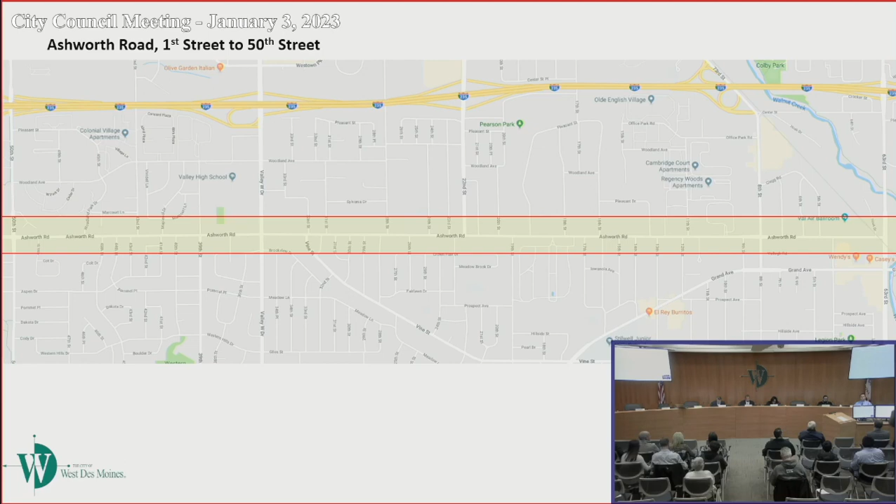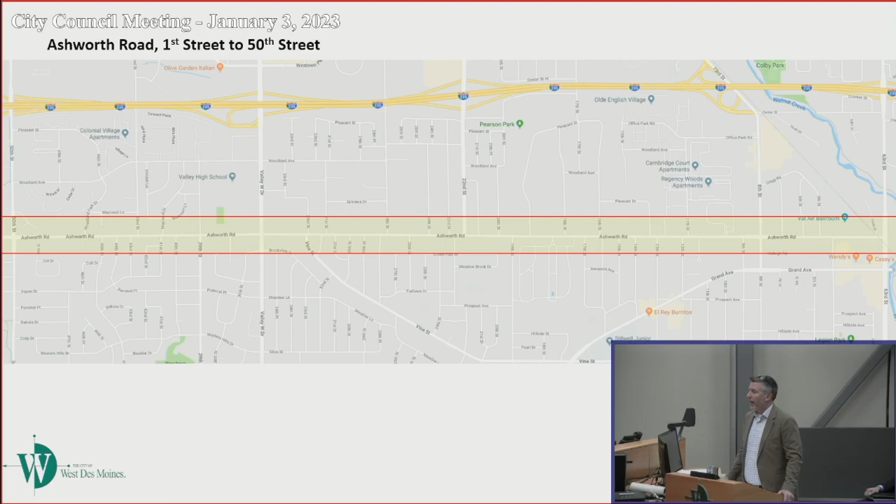Brian Hemesath, city engineer. I met with some of the council members about this, and one of the council members can't be here tonight, and that's Councilman Trevillyan. I've got a letter that I will start off reading, and then I'll go into a presentation, and then I'll answer any questions from council members, and then we can go into comments from the crowd.

As he mentioned, this is a letter from Councilman Trevillyan, who really wanted to be here but was unable to attend tonight. Ladies and gentlemen, as I am unable to attend the city council meeting on January 3rd, I would appreciate it if the following letter would be read during the workshop for the Ashworth Road project and made part of the permanent record of the meeting. So we will go ahead and make this part of the permanent record for our workshop.

I've had several discussions with our city engineering staff and residents about the Ashworth Road reconstruction project. Although I understand staff's reasoning for recommending a 3-lane configuration with a dedicated turn lane the entire stretch from 1st Street to 50th Street, I do not believe this is the best design. This is a residential roadway with over 150 driveways and 49 intersections.

A large number of the residential properties have driveways that require cars to back out onto Ashworth Road, and by having only 1 lane east and west, it will be difficult to get a break in traffic to be able to get onto Ashworth. With so many intersections controlled by a stop sign, it will be difficult to turn onto Ashworth. Also, there will be drivers waiting to turn into a driveway or side street and having to wait for a break in traffic. I am concerned that drivers will get frustrated with waiting and will 'take a chance' and cause a crash with another vehicle.

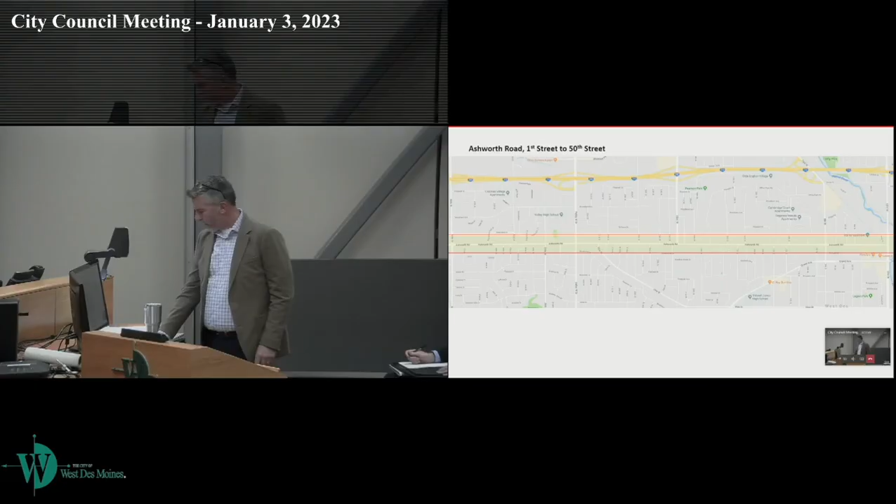Okay, Brian, if you want to lead us through. I will briefly take it through the presentation, I'm going to try to be as brief as possible. We appreciate that because I believe everybody here has heard this presentation several times. There's some new information here, a little different than what we've given in the past. Some of the council members have seen this.

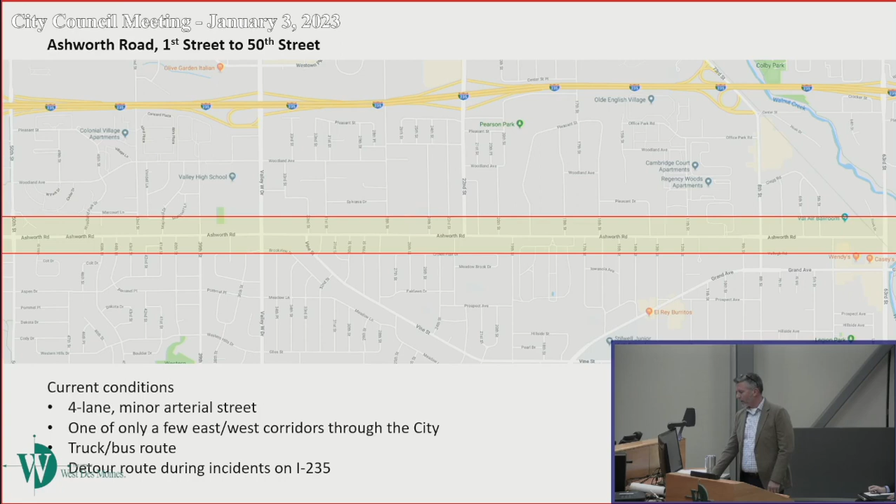Generally speaking, the current conditions of this road are a 4-lane minor arterial. It's one of the few east-west corridors we have through the entire city. It's a truck and bus route and detour during 235 closures or incidents.

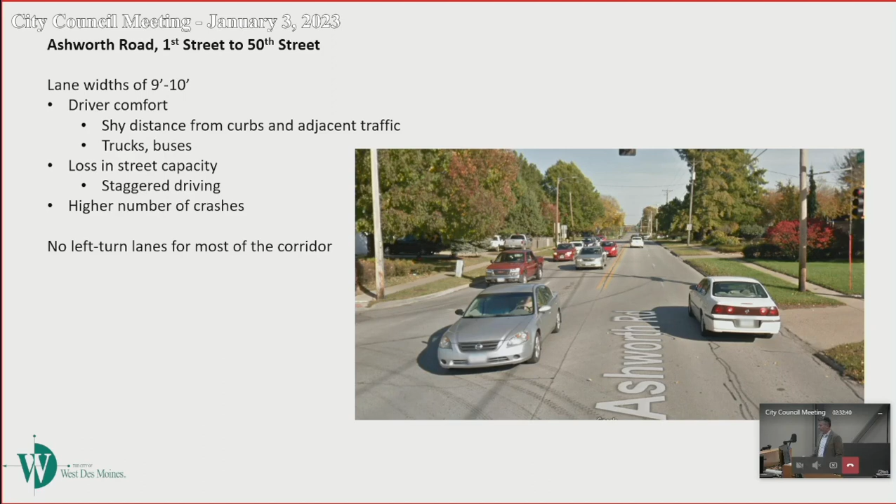Everybody's seen this, they know that the current lane widths are narrow, that driver comfort is an issue. We have issues with street capacity because of staggered driving, and you can see some of that here in this picture. And then we do have a high number of crashes, which I'm actually going to go through in more detail.

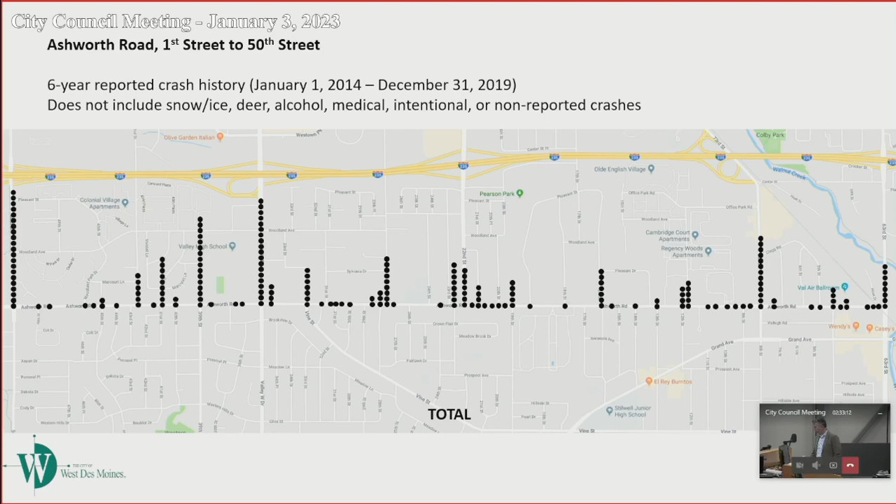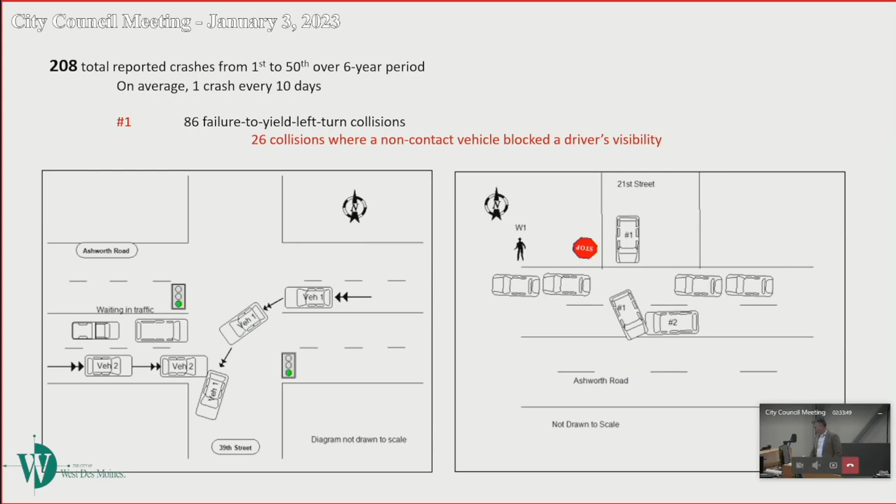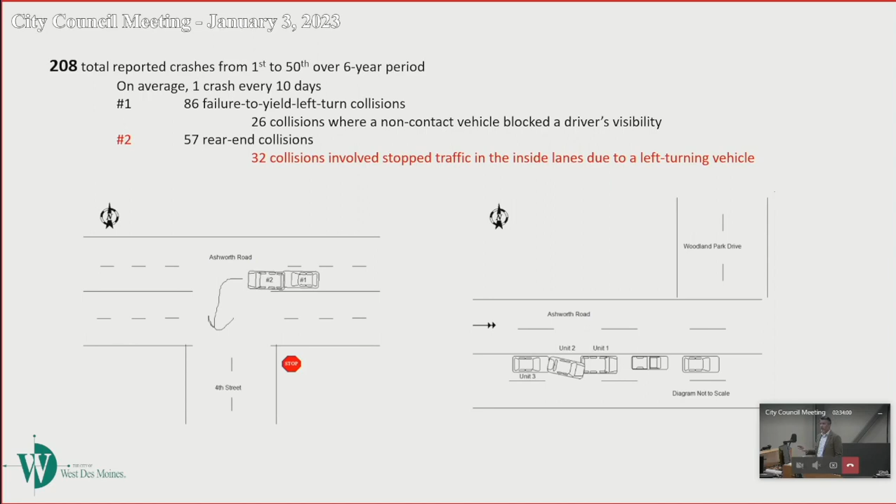26 were directly attributable to the fact that this is a 4-lane road and doesn't have a left turn lane, so there's 26 collisions in that 6-year period. Rear end collisions, there's 57, but 32 were directly attributed to a left turning vehicle, meaning that if there would have been a left turn lane, these collisions would not have happened.

And then lane departure collisions, which is more in line with the lane widths. If you have narrow lanes and cars running alongside of each other, side swiping, striking vehicles while turning, and or running off the road - those collisions are directly attributable to the lane widths.

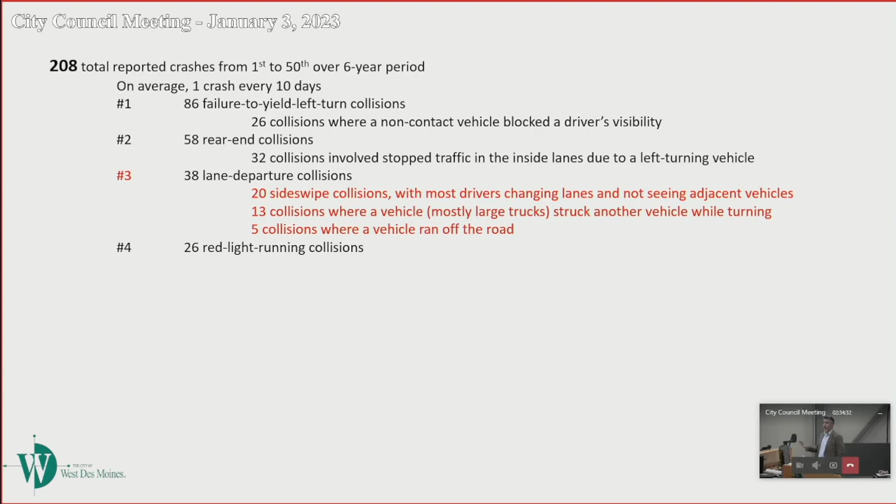So this is the same slide as before, but what we've done is colored in the dots of crashes that are directly attributable to not having left turn lanes - those are the red dots - and the yellow dots are directly attributable to having narrow lanes. And you can see there are a lot of colored dots.

You'll notice that at 50th, Valley West, 8th Street, there's no colored dots there. Those intersections have a high volume of traffic, that is why there's a higher volume of crashes there. And those intersections are already widened out to the maximum amount that we would ever widen them out to, so we're not going to correct any crashes no matter what we do to Ashworth at those intersections.

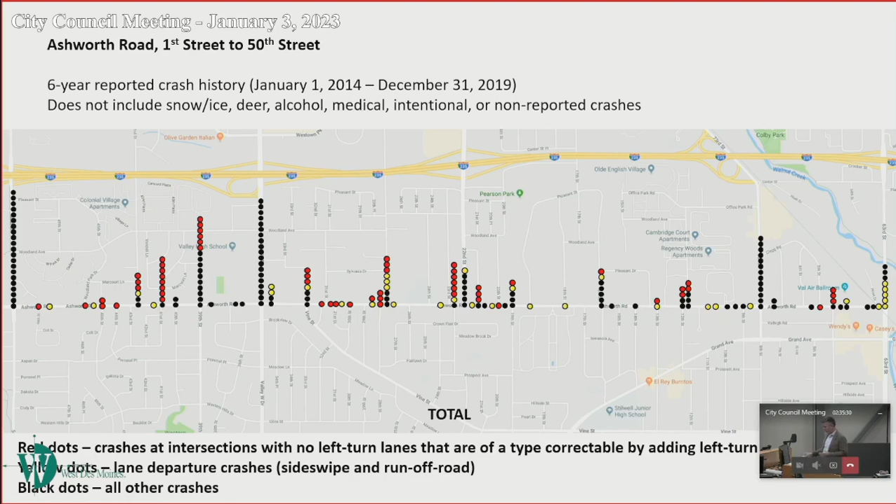So in summary, there's 147 total crashes. The lack of a left turn lane is a contributor in between 40 and 50% of those, 10 to 20% on the narrower lanes. And of all the crashes, 40% of them resulted in injuries, with 3 crashes resulting in serious injuries. Is that 40% of the total crashes, or of the crashes attributable to the 4-lane sections? Okay, that are attributable to the 4-lane sections.

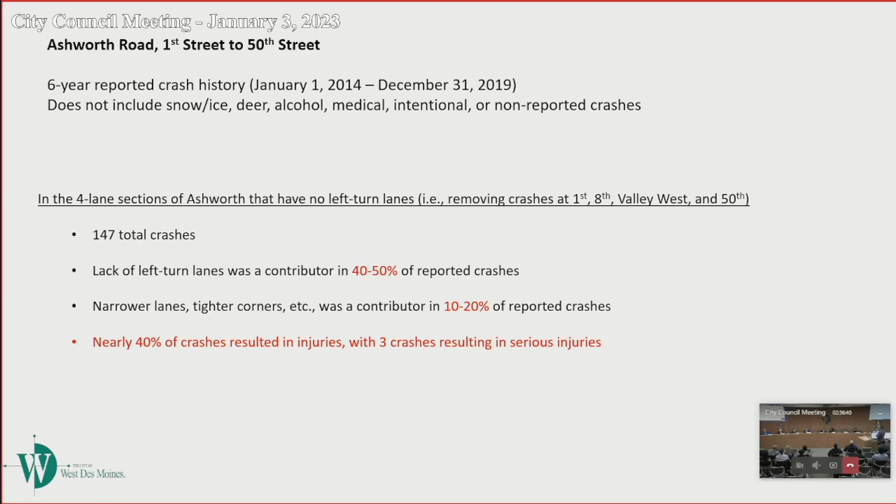Brian, can I ask a question? Sure thing. Could you just go back? So are you saying that 50 to 60% of the crashes are attributable to the current configuration on Ashworth? Correct. And these are 50 to 60% of crashes for the current configuration, ruling out DUI or anything else? Yep, we ruled out DUI, and we actually removed the crashes at 1st, 8th, Valley West, and 50th, because those are already widened to the maximum, and we're not going to be able to fix anything at those intersections. Okay, thank you. You bet.

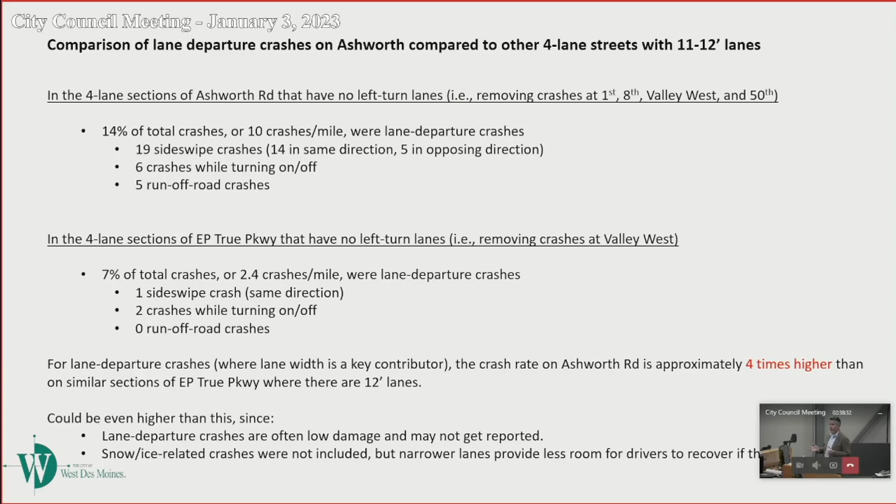One of the big things we need to talk about today and have a decision on by the end of this meeting is whether we have a 3-lane road from 1st to 50th, or a 4-lane road from 1st to 50th.

I'm going to go through the feasibility of a 3-lane cross-section for Ashworth. Safety improvements are probably the biggest thing—we eliminate the 40 to 50% of crashes that I showed in an earlier slide, virtually eliminated because of the introduction of a left turn lane.

We've done a lot of research on studies done across the state, with help from residents who gave us studies to review. We found that research is overwhelmingly clear: 4-to-3-lane conversions provide safer operation.

Looking at studies in Iowa for 15 before-and-after locations, you can see the reduction in crash rate, crash density, and injury crashes. We've also found in a lot of cases it helps with speed—it calms traffic and slows speeds down. It's one of the top safety countermeasures according to FHWA and the DOT.

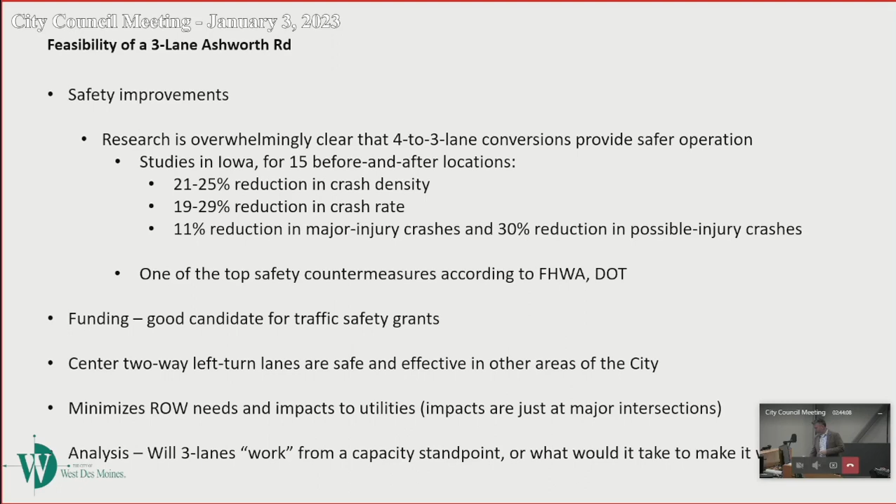We can't do a do-nothing option. We have to replace Ashworth Road. I think that's something that is pretty evident.

We've also heard folks ask about doing a pilot project. We could do a pilot project. The idea would be to let it sit for several years and analyze the crashes and how it works and so on. And in that time, 19th to 22nd is going to deteriorate to the point that we're going to have to spend potentially hundreds of thousands of dollars, up to $1 million, to re-overlay that so we can buy ourselves more time. Because the last time we did that overlay, which wasn't very long ago, that base was not good. That is why we're in kind of an urgent situation to get something figured out for this section, because it looks great today, but it won't take long. A few more winters like we've been having, these cold temperatures, freeze and thaw, freeze and thaw - it's not great for that subgrade.

So how much did that overlay cost us? I don't know that off the top of my head. Yeah, it's in the hundreds of thousands of dollars. And when we're doing overlays, I mean, the age of the road, when it was initially laid to the last overlay we do, we're talking decades. Oh yes, decades, absolutely. 50 years. We like to get 30 to 40 plus years out of our concrete pavements. And then we try to do anywhere from 12 to 8 years on our overlays, depending on conditions and the conditions of the pavement beneath. And that's after doing concrete patches. Oh yeah, that 30 or 40 years includes crack sealing, concrete patching, and a lot of other work as well.

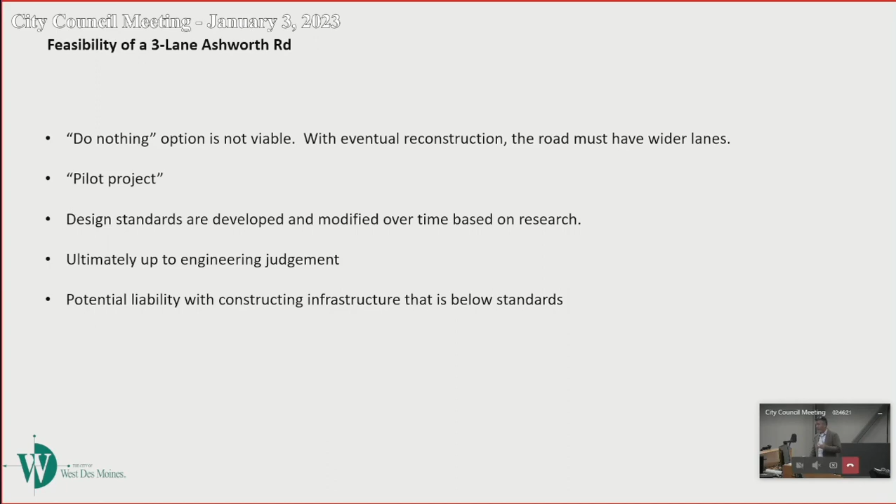Okay, I'm going to try to get - I'm going to skip over a few of these. Our design standards are developed and modified over time based on research. Ultimately, it's up to our engineering judgment to provide what we think is the best solution to you, which we are going to show you now.

At the last workshop, there were several alternatives brought up by your constituents with different ideas of what we could do between 19th and 22nd. We've looked at those and we're going to present them here now. What I do want to do is show you the first one, which is the recommended alternative. I'll go back to it because we're going to have to switch between slides and show you the differences between the two. I'm not going to go through the reasons why we're choosing this option - there's 10 of them listed on the screen there.

But this is the best option overall from a city standpoint. Is it the best option for the people that are getting right-of-way purchased from them? Probably not, that's the facts. But for the greater good of the city, this is the best option. And I'm telling you that as a professional, giving you that advice at this point in time.

So this was one of the options that was brought up: how can we just do 3 lanes in there, because with the two-way left turn lane, we can shift and adjust lanes and just keep it 3 lanes all the way through.

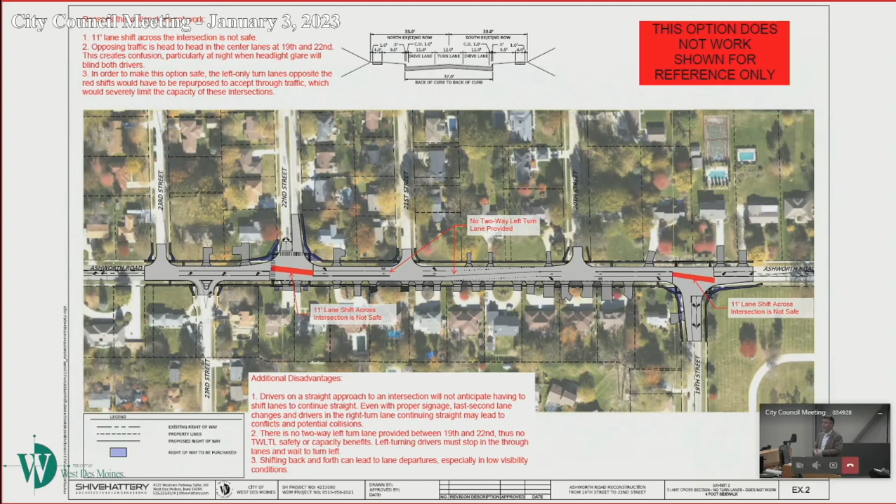You'd have to shift twice, and one of them would be in an intersection, and you don't want shifting in an intersection, because as you're driving through the intersection, you're going to be head on with the left turner, and then you're going to have to turn 11 or 12 feet to get out of the way of that car to continue on. Driver expectation is not that.

I'm trying to remember what the difference between this option and the next option is. So, two-way left, one doesn't. Okay, so this, and Eric maybe, this alternative is four lanes between 19th and 22nd, 3 lanes coming into it from both directions.

But again here, you have to shift traffic. If you're going westbound, you have to shift over a lane to continue through this intersection, and that again defeats driver expectation. Another thing is we would have to paint these lines on the pavement against what the pavement joint lines are, and the de facto lanes, when you can't see pavement markings, are the concrete joint lines. So this again is not a great option.

And this one is basically just carrying a 4-lane section through, painting out certain areas. But again, you've got to shift traffic through. If you do anything from a 3 to a 4 to a 3 through this intersection, you're going to have to shift traffic, so a person driving through these 3 blocks is going to have to move over to make that work, no matter how you cut it.

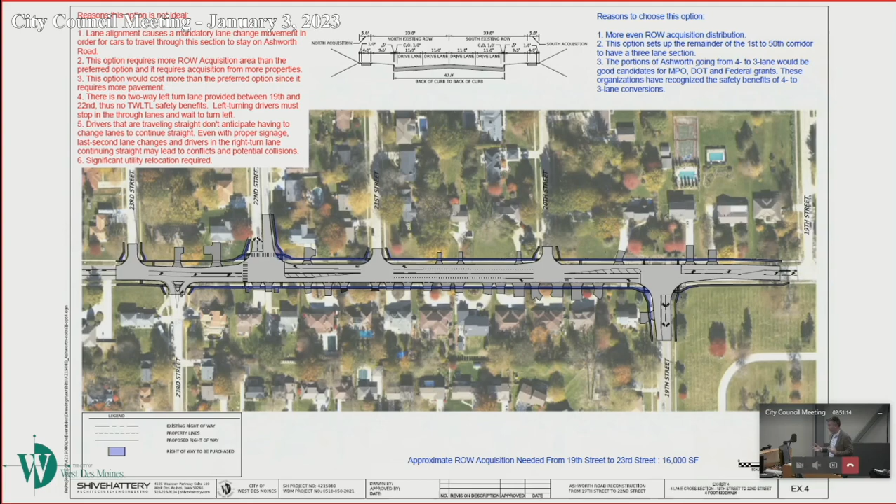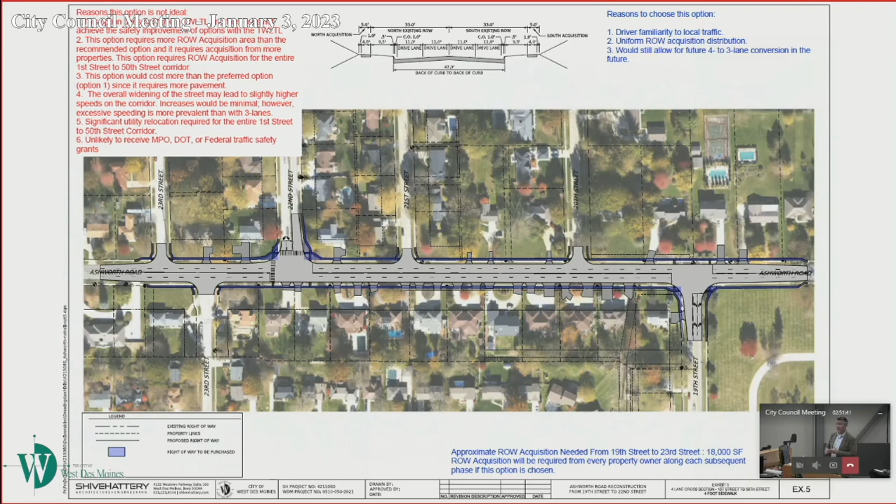Now, that doesn't happen when you do 4-lane across the entire stretch, if you do 4-lane from 1st to 50th. So then you don't have that lane shifting. But what this does is it doesn't eliminate the crashes, the 40 to 50% crashes that we were talking about earlier with rear end crashes and left turn crashes. So that safety aspect of the change does not exist. And this is a lot more expensive because there's more concrete in the ground.

Another thing we're going to be talking about at length is lane widths and why we choose the lane widths we do. In new areas of town, we use 12-foot lane widths wherever we can, and that's the preferred lane width by our design standards, the statewide urban design standards widely used across the state. In this case, because of the constricted right-of-way, we are willing to decrease those lane widths to 11 feet.

If you do that in this cross-section, you will end up having to buy right-of-way from every property owner from 1st to 50th, and it'll look a lot like it does here, in that, I'm colorblind, so I think it's blue or purple.

You'll have to do that along the entire stretch of the road. Now, can we eke in a little bit here and a little bit there? You bet. But ultimately, if you want to fit this road into that cross section, into that right of way, you're going to have really narrow parking, which is the area between your back of curb and your sidewalk, which is where all of the utilities lie. I've got a list of literally dozens of utilities that we'd have to try to fit into that small, narrow parking, which isn't going to be physically possible.

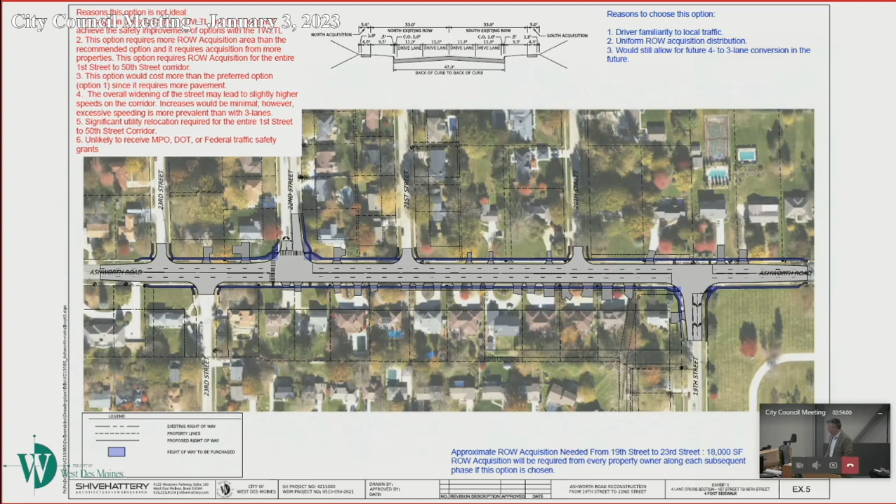Okay. So ultimately, we are recommending this solution. It meets current design standards and improves safety. It's a strong candidate for grants, accommodates trucks and buses, and minimizes right-of-way needs along the entire stretch of the road.

And not to be Captain Obvious, but can you state what this is? Three lane? Sure, 12 feet, 11 feet? So what we've come up with is a cross-section that has three lanes: an 11-foot lane, a 12-foot center turn lane, and another 11-foot lane.

But then you have to add on a curb offset on each side, which is 1 foot, because people don't drive right up against the curb, so that is a requirement. And then there's a half a foot of curb. So essentially, what we're looking at is from the back of curb, it's 18 and a half, 18 and a half. So it's essentially the exact same cross section that we have today.

So with the exception of the turn lanes at 22nd and 19th. Now, there is one thing that we noticed today in some of the discussions we had: when we add these turn lanes in this location and this location, it essentially makes this lane right here and this lane here a through lane, which could be reduced.

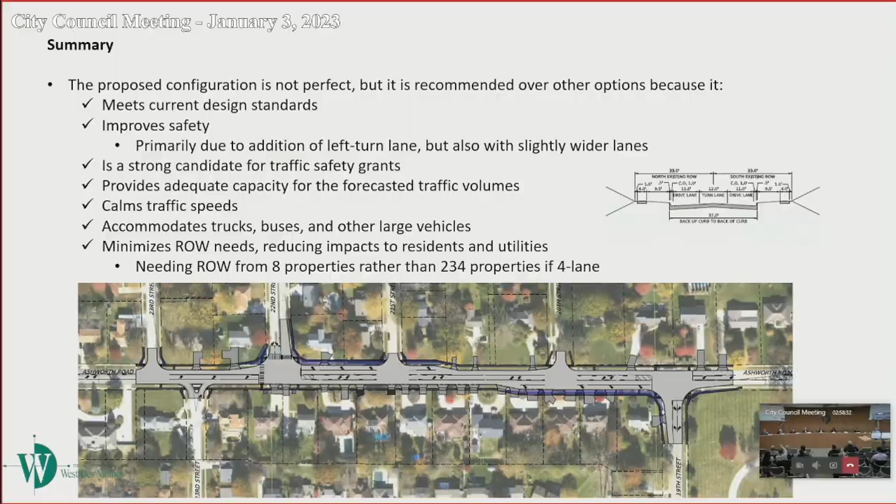Come up, I want to see. So, 12 feet in the middle, 11 and a half feet, and then the right turn lane, how wide is that? And the parking, how far is that? Can we blow that up? Can we bring up that cross-section? Yeah, it's small, I apologize.

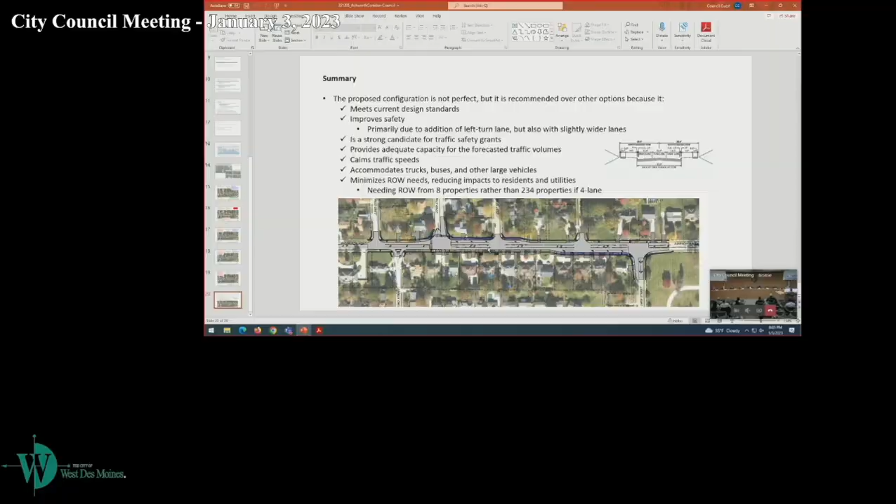All right. I believe this is it, Nate? That's the one at 22nd, yes. The one at 19th is the same, just on the other side. Here it is, right here.

This is what we're proposing. Can you make that even bigger, Brian? Can you blow that up a little bit more? How many lanes?

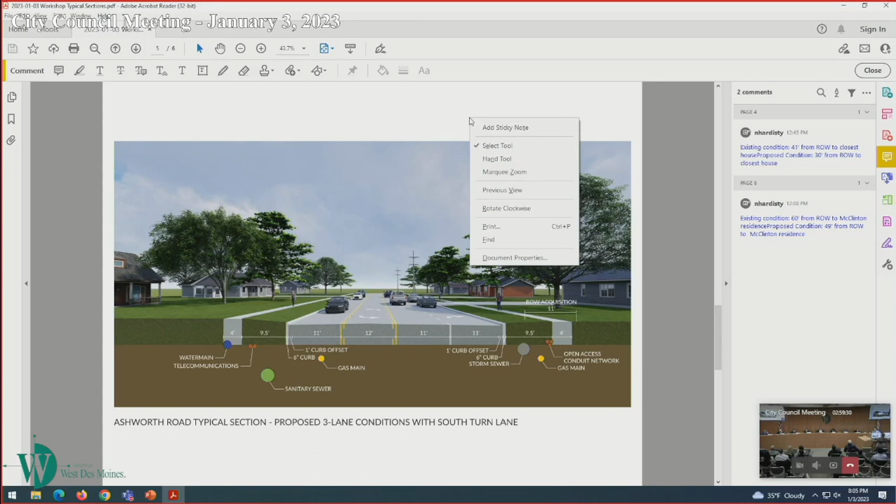Is there a full screen option on this? Or is it just zoom in? Hit the sign up above in the middle. 43.7 — oh yeah, if you close the right... let's go 32. Oh yeah, close this thing, yep, got it.

So this is essentially three 12-foot lanes with an 11-foot right-hand turn lane in between 19th and 23rd, and 9.5 foot, 11-inch lanes.

11 foot — well, 11 foot, that's what I mean, not counting the curb and the gutter. I see, it's essentially — right, this is just where the turn lanes are located. I think this is really the crux of the situation, the areas where right-of-way acquisition is happening.

And those are the areas in purple that were on the PowerPoint slide. We're at a 4-foot sidewalk, correct, 9.5-foot parking, correct, we're at 11-foot right-hand turn lane. Parking is a rural term for in between the curb and the gutter — call it the grassy knoll, I don't know — and it's in between the curb and the sidewalk. Or, I mean, curb and the gutter, no, curb and the sidewalk.

So we have 11-foot right turn lanes, right? We've got a 12-foot center lane, then 11-foot the other direction, and again 11-foot right-hand turn lane. And these are all the minimum allowable in SUDAS. We don't typically do this, but in this situation, in the context of the situation, we believe this is the best solution to minimize right-of-way and make it a safe roadway for this area.

I'm Dell Christensen, 932 32nd Street, right on the corner of 32nd and Ashworth. If Ashworth becomes a 3-lane road with a center lane for passing, what is going to be the traffic backup? There's 147 driveways along there.

For the trash man going down the street, you can't pass them in that turn lane. So all that rush hour traffic in the morning especially will be lined up behind that trash man. Now, the way we have it now with the 4 lanes, they're narrow lanes, but they can still get past.

Another thing — I don't understand why, when they are designing these streets, they use only at the max a 25 foot radius on the corners. Trucks and stuff, trash trucks, city buses, it's pretty difficult for them to make a right-hand turn with that small of a radius.

Simple things like this, I think, could help the traffic. And I can't see where a 3-lane road is ever going to help anything, given that most accidents are at intersections, not in the lanes.

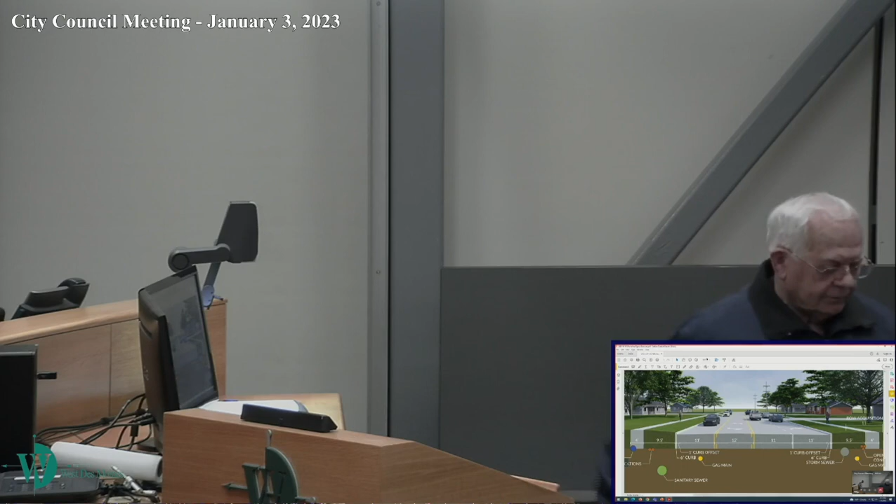Okay, I'm writing down some of the questions you've come up with. At the very end of this, the public is going to speak, and we're going to close the public hearing essentially. The council's going to ask questions at that time of Brian and staff, and if they have questions for the public, they'll ask those as well. Come on up.

Hi, my name's Alicia Trogdon, and my husband Brian and I and our family live at Ashworth and 21st Street. So we are actually going to be where the turning lane is going to be put in. I'm not sure, on his slide he did show our house. It is going to be quite a bit of yard that they are taking. That is actually the only usable part of our yard that we have, where I have all my daycare stuff. So that is very disheartening for us to see that yard is going to be taken.

However, that being said, I am always open for upgrades that need to be done. I understand Ashworth is very narrow. I travel that road to 50th, and down to 16th to take another daycare kid to the Catholic school, so I'm traveling that road multiple times a day. I do know that it is very narrow. I drive an SUV, and it is narrow.

I agree that something needs to happen. The turning lane, how it's proposed, I'm not seeing that it would alleviate any of the congestion that's right there. The turning lane does not seem to be long enough. It's a busy road, right? Like you said, it's the one road from east to west through Des Moines, and I don't know that the turning lane is going to help that situation.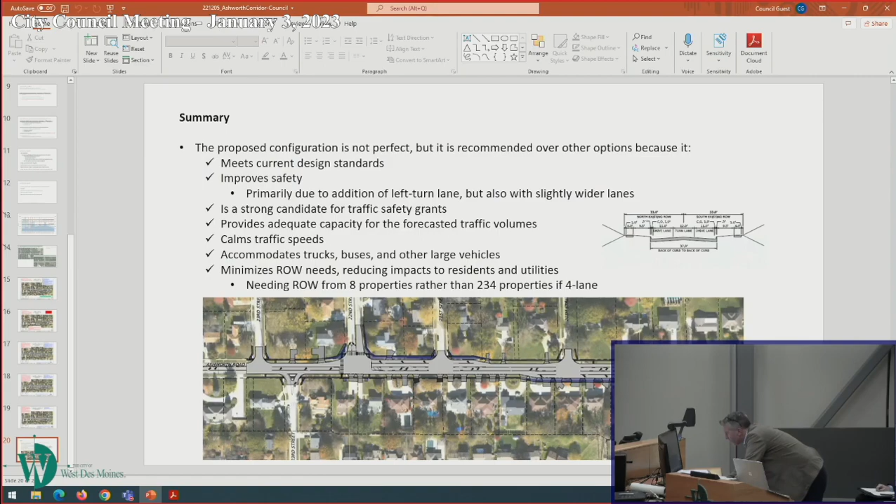I'll try to zoom in on it as much as I can here. Let's see, it must be down here. There, I think that's as close as I can get without starting to lose stuff.

What if a truck were to stop there? So the truck stops here, and you can enter this lane, go around them, and continue on. Is that the question?

I thought I had heard that the vehicle would park in the turning lane. That is what she is saying some people would do. I would not recommend that, but I get it, that's their prerogative. If they choose to do that, it's illegal. People do a lot of stupid things. Yeah, that is not permissible.

I hear you, but the scenario presented is somebody parks in the turn lane, in the center, the two-way left turn lane in the middle, and you're coming up on them. You would just continue going straight. I don't know if I understand your question. Just don't hit the delivery person who's crossing in front of you, apparently.

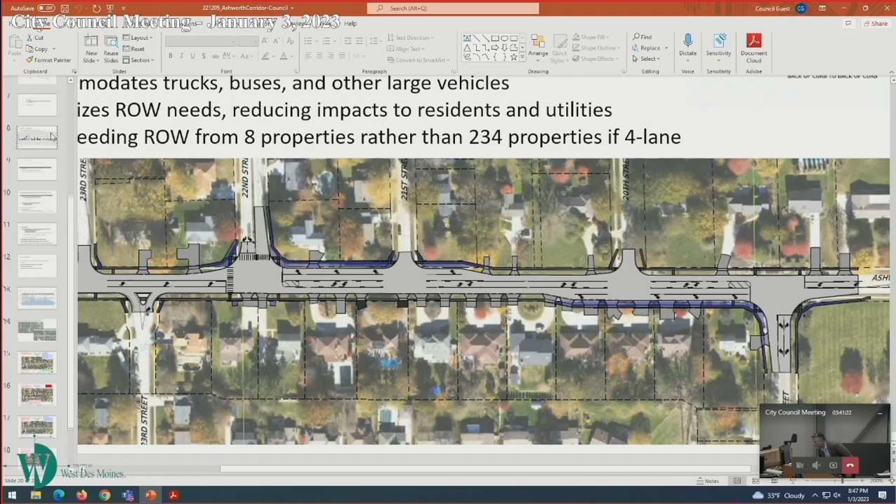These are, and I've got to zoom out now, but these are where the reported accidents for the last 6 years have been located, taking out snow and ice, deer, alcohol, everything written up there. These are just your standard run-of-the-mill accidents in the last 6 years. Okay, and it would make sense that a lot of them are probably at intersections. Look at some of the more major ones, there's a lot more accidents, but we pulled out a significant number of them because of those other things. There's a bunch here that are not at intersections, but there's a large number that are.

Correct. Okay, and then Dell doesn't want 3 lanes. There was a question about where emergency vehicles go. Right, so at the last workshop we had a slide in there. I've talked to the EMS and fire chief.

He far and away prefers a 3-lane cross-section, because then people will just stop in that lane and he's got that center left turn lane to go down the road and not be impeded. As it stands right now with the 4 lanes, people just stop and then they panic and don't know where to go, and they're weaving in and out, and that's just not safe for them. That is directly from our fire chief, EMS chief.

Okay, moving on to Alicia, taking only the usable part of her yard. Doesn't see that the turning lane would alleviate congestion. The turning lanes are not long enough.

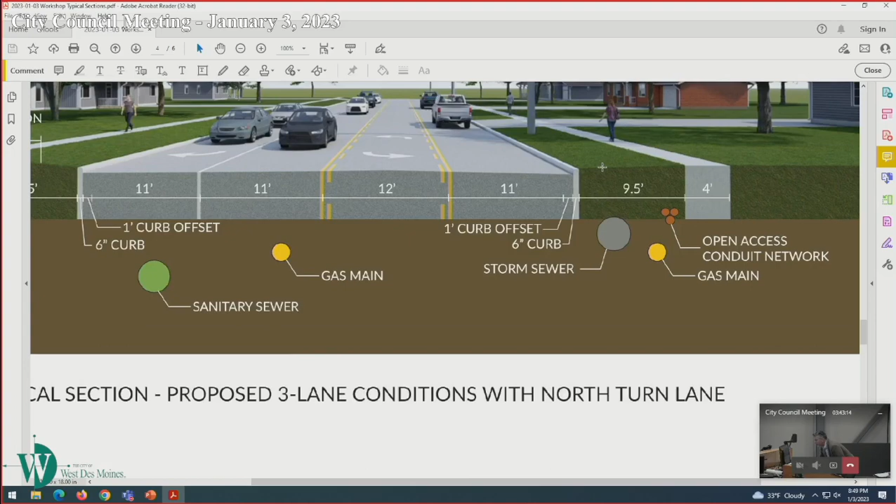But if you make them longer, then you're going to get into more people's property, aren't you? You guys came out with this design, like you always do, and made it as tight as you possibly could to get it off people's property from the first draft, correct? And part of that was making these turn lanes as short as possible. So you could address Alicia's issue and make them longer, but now you're taking other people's properties as well.

Right, I mean, we have applied future traffic to these traffic models. We've done traffic models all over—we have a model for the whole city that we use. We've tested it against current traffic volumes and turn movements and things like that, and it's accurate plus or minus a pretty small percentage. So we're confident in these models, and we believe these turn lanes are the proper length. We wouldn't ever make them longer than they needed to be, or shorter.

Okay, and taking only the usable part of her yard—I'm assuming she's at 21st and Ashworth. This is something Nate with Shive-Hattery provided this morning. Can you explain the existing condition? We're 41 feet to the closest home, and with the 11-foot right-of-way acquisition, we would be 30 feet. Yeah, this has an 11-foot purchase. It was more when we had the trail on the north, but without the trail, it's 11 feet as proposed. The closest house is 41 feet—I think that's actually the one right on the corner, the northeast corner at 22nd and Ashworth.

Okay, so they're saying 10 to 15 feet from the side of their house—that's not accurate? That is not accurate. You're adding an 11-foot lane, but then you have to put in this right-of-way acquisition. No, all that's there today—the sidewalk will basically move back 11 feet. That's what we're talking about.

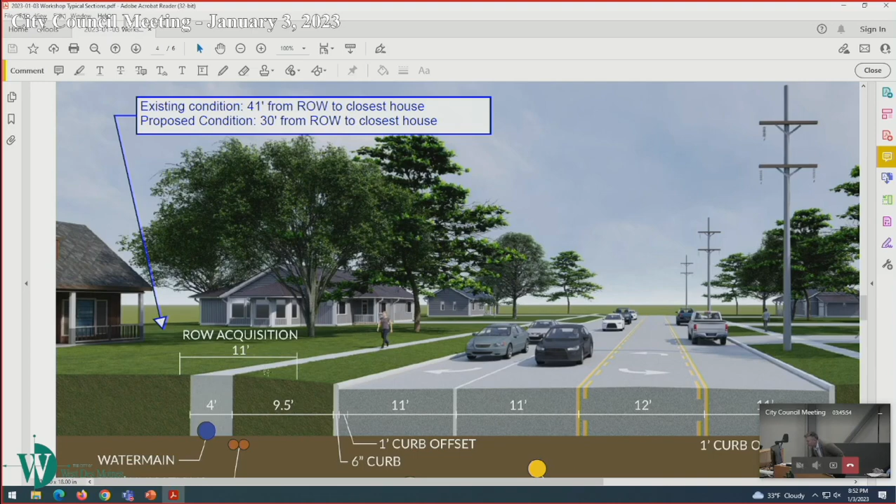Okay, doesn't want to see the turning lane—turning lane does not alleviate. You said the turning lane does alleviate. How is left turn going to work out 21st onto Ashworth? Let's see, I've got to get that picture up so I can see exactly what they're talking about. My question is, doesn't the same issue exist today? It does. Okay, so this doesn't make it any worse, any better. Correct.

That is true, but there isn't going to be any more traffic on the road because we built this.

Brian, is the expectation for a resident turning at this exact spot that they go into that center lane? Not necessarily—I mean, that's an option for them, but not necessarily.

Okay, trucking on right down through. Going back to Eric—every accident is turning in intersections. We've seen that, not every accident, but there are a large number of accidents that certainly meet that. Tons of Amazon, FedEx easily slide over with the 4-lane, but insinuating there's going to be issues with the 3-lane—we've had that discussion.

I think he also mentioned side-swipe accidents, just hitting mirrors—Eric did all the analysis of those, and there's actual property damage to the vehicles. It's not just mirrors getting hit, and usually those are the ones that don't get reported. These are property-damage-to-vehicle type accidents. We wouldn't even put a couple of mirrors hitting on the list. How many of them are due to a blowout on a tire?

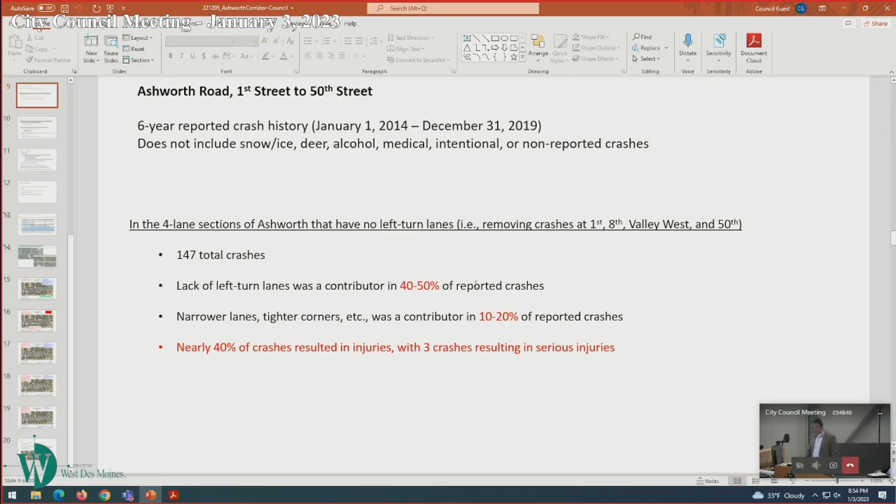There's a comment that we're doing this because of the grant money. That's not why we're doing it. It's nothing compared to the total cost of the project itself. The road's falling apart and we have to replace it. We can't keep doing asphalt overlays because you physically can't do them anymore.

I am interested in the grant money because that's going to defray the cost to the taxpayers of this city, if we can get federal dollars, if we can get the RISE grant, whatever Eric talked about. But it's not going to pale in comparison to the total cost of the project, because we can apply for funding and receive it over multiple years for many projects.

That's what we'd intend to do with the Surface Transportation Block Grant funding from the MPO, continually asking for that money every year. We could potentially get $1.5 million a year and keep putting it in the coffers to pay for this road, so we don't have to come up with the money through a straight GO.

My impression is we're pretty good at applying for these, right? In the past 3 years we've gotten something like 500, 700, 900 thousand, I don't know the exact numbers. About $1 million, between $1 million and $1.2 million. So we are very good at applying for these and receiving them, which means we know the business.

There's also other funds, TSIP funds, Eric, is that what they're called? Traffic Safety Improvement Program. That's potentially another $500,000, and they would salivate over a 4-to-3 lane conversion. But we're doing this because the road needs to be done, it's deteriorating. We're not doing it because there's grant money. We're not saying 'hey, what road can we fix.' That's not why we're doing it.

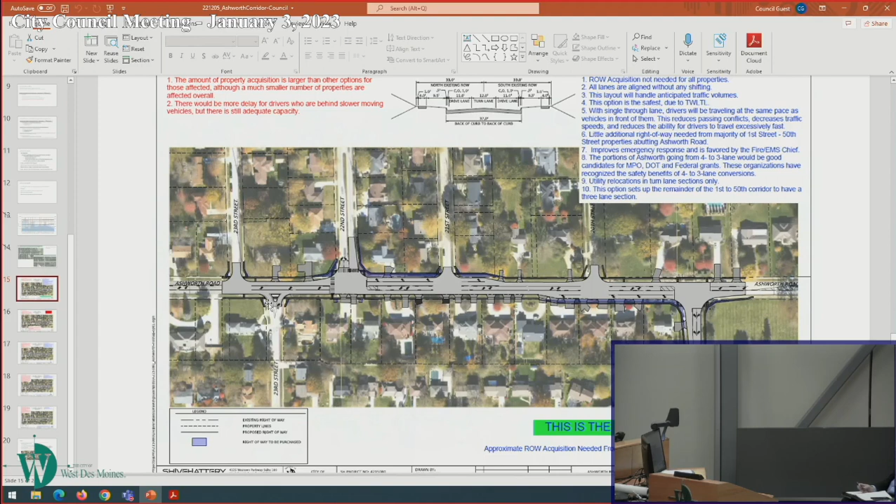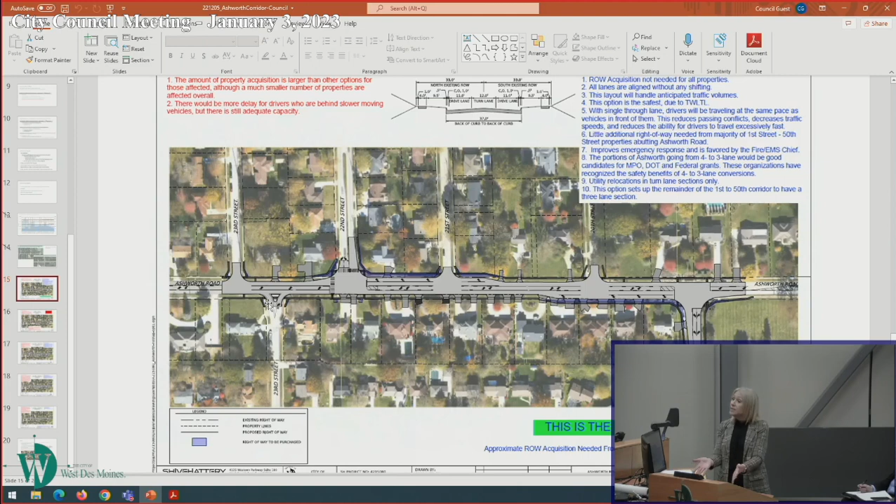I just have a question about the intent with the 4-lane option, continuing with 4 lanes. At the last meeting, were we not wanting to look and see if a 4-lane could still work? Was that an option for us to see? Brian, will you go back to that one?

If that's part of this, the 4-lane option, or if we can look at a 4-lane, can there be an option to reduce speeds on Ashworth to address the safety concerns we're pushing this project with? Can we reduce the speed 5 miles per hour?

I would tell you no, not unless it's warranted. I can tell you that based on experience. When we did that on Grand Avenue, that was probably one of the dumbest things I've ever done as a council person. We reduced the speed, and I got more comments that it feels like we're crawling, and there's no reason we're going this speed. I got more people upset with that.

It made no sense. How wide is Grand? It was after we widened it, but it didn't matter.

It's based on warrants and traffic studies to determine what the speed of that road should be, and what the 85th percentile of speed is that people are going at that time. That's how they determine it. But for us to just reduce it by some amount doesn't make any sense. We've done it before and we've learned from it. We could certainly study it again and see what that 85th percentile is, and maybe we need to reduce the speed, or maybe we need to increase it. We could study it, but without studying it and doing the warrants, just doing it willy-nilly like we did on Grand Avenue...

...it was a disaster, and we had to put the speed back.

Basically, our number one recommendation is the 3-lane with the 2 turn lanes at 19th and 22nd. Our second option, or preference, would be 4 lanes across the entire project, but not at the lane widths that Councilman Trevillion is suggesting.

At what lane widths then? We would be at, essentially -- I'll leave the curb offsets off because I've been accused of not actually saying what I'm saying, but I was trying to explain lane widths. We'd have a 12-foot outside lane, 11-foot, 11-foot, 12-foot.

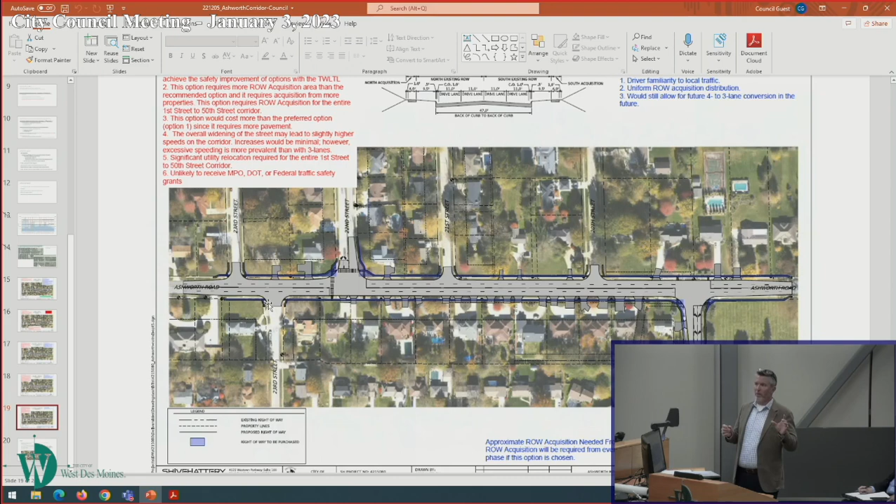And if we put that in a typical cross-section -- I did the math earlier, now I can't remember it exactly -- but that leaves almost no room for parking or the grassed area between the sidewalk and the back of curb for utilities, which is unacceptable. We have to have room for those. And the other thing we're not talking about is snow removal.

Not just snow removal, but when the plows come through, we're all annoyed when we snow blow our driveways and they come back and push the snow in front of it. I see Brett sitting back there -- what is the minimum parking width area we can have to make sure we're not having the snow plows brush all the snow along the entire length of people's sidewalks?

No offense to Brett, his guys do a great job, but I live on 50th Street and I've got 12 feet between my sidewalk and the back of curb, and I still get plow stuff on my sidewalk. So it's just the speed at which they do it, and they're doing their job. Right, and it's no fault of them or what they're doing.

They have to get it done efficiently. So the minimum, I don't know that we really have a minimum. The more you have, the better.

But how far could we go down if we wanted to mess with that parking area? Well, if you went down to what was being recommended, like Councilman Trevillion's recommendation, you'd have about 4 to 4.5 feet of parking. And at 4 to 4.5 feet, you're going to have the windrow in your sidewalk. You'll be plowing snow this high. That's what we have today, though. We've had that for 20 years.

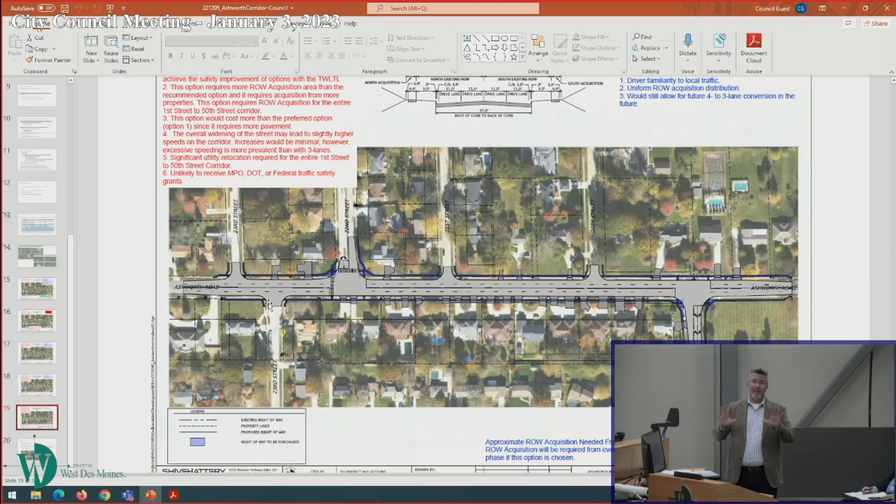Right, and I believe our engineering staff believes the recommended option is the safest option, far and beyond a 4-lane option. You'll have faster drivers, you will not fix the left turn lane crashes, you will not fix the rear end crashes. There'll be people stopped in the through lane, and those will be eliminated or close to eliminated with a 2-way left turn lane.

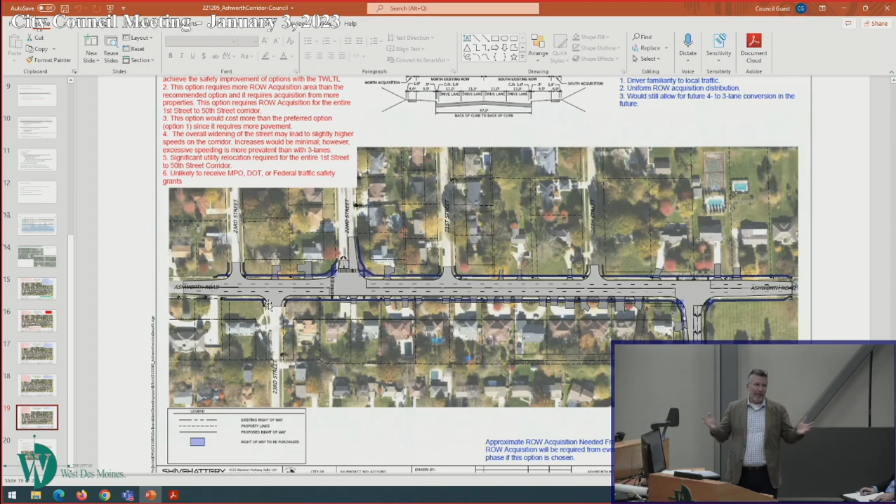Okay, Greg, your preference, 4-lane, 3-lane, what Brian has recommended? Oh, do you want to start with me? I'm going to start with you. All right, we're going to go right down through, and we're going to wrap this up. We're not making decisions tonight. We're trying to get consensus on the direction we're going.

After this, would we end up having another public hearing or some council action we would take to go forward? Well, we would begin, we would start the design based on the recommendation from tonight, and then we would begin acquiring right-of-way properties based on that information. And you'd start from 19th and go to, yeah, just outside of 19th and just outside of 23rd.

Okay, 4-lane, 3-lane, two different options. I think it's really, really important to understand that if we do that 4-lane option, it's going to take a lot of right-of-way. Am I right on that? If we do the 4-lane option, it's going to take a lot of right-of-way, significantly more, quite a bit. Obviously it'll take more if you have 4 11-foot lanes and even a couple 12-foot ones. It's going to literally take more than 3 12-foot lanes, because that's 36 versus 46.

I mean, that's going to take more. And so if there's an understanding among the community that they would like the 4-lane, understand that will necessitate the taking of more land. We haven't seen a 4-lane plan. It's right in front of you. This is it, well, I guess this is just 19th to 23rd, so.

It would be the same across the whole city. What you see right there is essentially what it would be across the whole city, or from First to 50th. 4 lanes, and they're 10 feet wide. NACTO, he's citing SUDAS, but there's other things out there, NACTO and the Green Book, that say 10-foot wide streets are perfectly fine, and in some cases preferable. He's citing SUDAS because he loves this SUDAS.